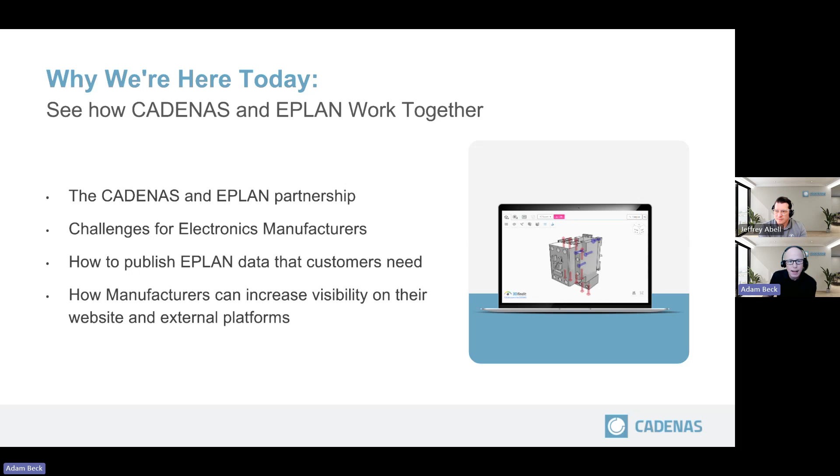I'm going to just hit the lobby button here because it's really blowing up about the Read AI meeting notes. Okay, check, sure, Read AI meeting notes. All right, back to it.

So just setting a baseline, what is eCATALOG 3D Find It by CADENAS? This is our online tool that helps component manufacturers deliver product data, configurators, 3D previews, and configured PDF data sheets on demand. Those are all qualified sales leads that happen right from your website. They help you build a great digital customer experience. It makes engineers want to come again and again, and it frees up your team from having to address those on-demand CAD requests. So it's really lead gen, customer success, and engineering support all in one.

And yes, read AI notes. I'll start letting people in, Adam, as they pop up, so you can keep rolling.

Thank you, the dinging. So really, what is the challenge today for electronics manufacturers? Many still rely on those PDF catalogs and data sheets, and few are offering those well-structured, up-to-date, dynamic EPLAN macros that engineers need. This reduces engineering efficiency, and it reduces the consistency for users, so they might have to do different things in different ways to get components into an overall design.

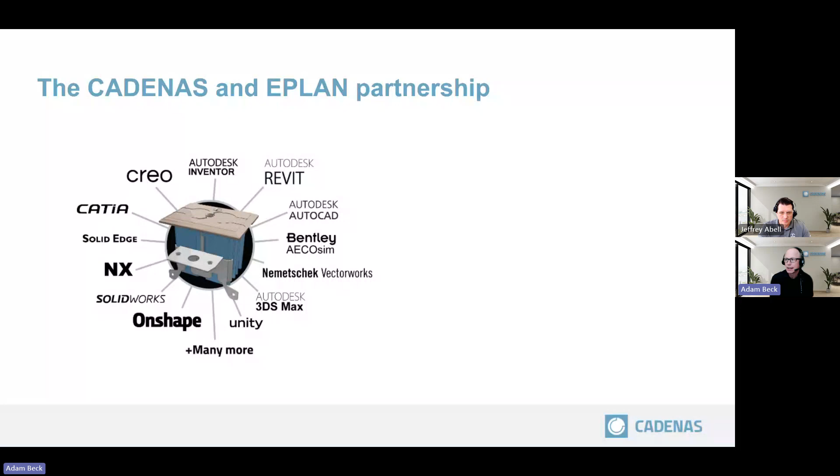So this new partnership with CADENAS and EPLAN is two companies working together to add complementary details, functions, and accessibility, and the goal is to deliver highly efficient, scalable, quality component data for EPLAN users. In short, it's what CADENAS has been doing for years and years for mechanical product manufacturers, providing all the formats that they know and love: Inventor, Solid Edge, SolidWorks, CATIA, Creo, NX, as well as many other BIM formats, but now the added layer of those EPLAN macros.

And Jeff, do you want to talk a little bit about what those EPLAN macros actually contain? Yeah, so there's, of course, quite a bit that goes into an EPLAN data set, right? And so what we're going to provide meets all those needs. The first part is this XML file, that's the structured product data, and that's going to include things like part numbers, descriptions, potentially ratings or certifications, all that kind of detail, the function templates, et cetera. So that's sort of the backbone that sets all the product data.

We also have the 2D data, of course, and that's going to be for anybody, if you're laying out your panel in 2D, you can certainly get the physical dimensions and everything from the parts that we provide, drag and drop those, move them around on your panel as you're laying everything out to check fit and so on. Same with the 3D, right? If you've moved on to the 3D design with some of the enhanced 3D features, you're going to be able to drop that model, that 3D model, directly onto your panel, make sure that it fits, line everything up, and get that 3D visual, kind of that virtual version or the digital twin version of your 3D model.

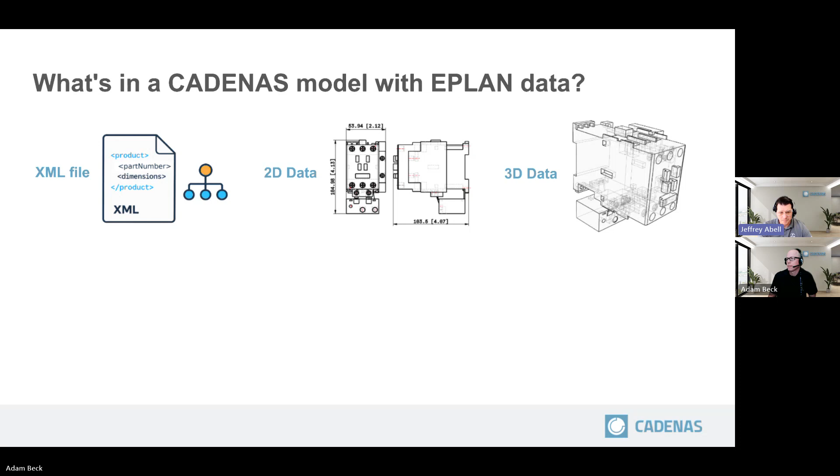We include the connection points, you see these red arrows that we've got on our models. Those will look probably very familiar to an EPLAN user, but that is the information about where the connections go physically, but also the attributes of those connections. What type of connection? Is it a screw connection? Is it a spring clamp? Things like that. How many connections you're allowed to have, what the minimum maximum sizes are, all that good stuff.

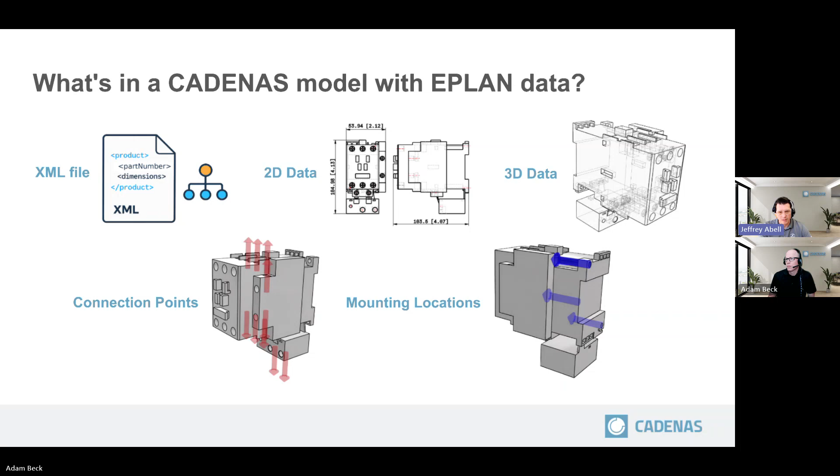And then last but not least is these mounting locations, and that's going to show exactly how that part mounts to either your mounting panel or whatever you're mounting it to, or if you're using a rail, it's going to snap onto that rail so that as you're positioning and laying out all your components, it's very intuitive to use that. And that information gets passed through. For example, like the mounting points, those can be passed through to an NC machine to automatically cut those things. So adding everything you would want in a complete EPLAN data set, we're delivering that with these kind of 5 key features that we've got.

And so what we've got today is structured and standardized electrical data for EPLAN users. What you can do on 3D Find It, we'll show you here in a minute, is you can go and find that component, review the documentation, visualize the product with the 3D viewer that we have, and download the EPLAN files. Comes with the EDZ package, right? Everything all in one.

Add that to your EPLAN database and then start dropping it into your designs. And it's all built specifically for the EPLAN audience, right? It is that EPLAN format ready to go directly into your EPLAN Pro Panel or P8, for your schematics, panel layout, all that good stuff.

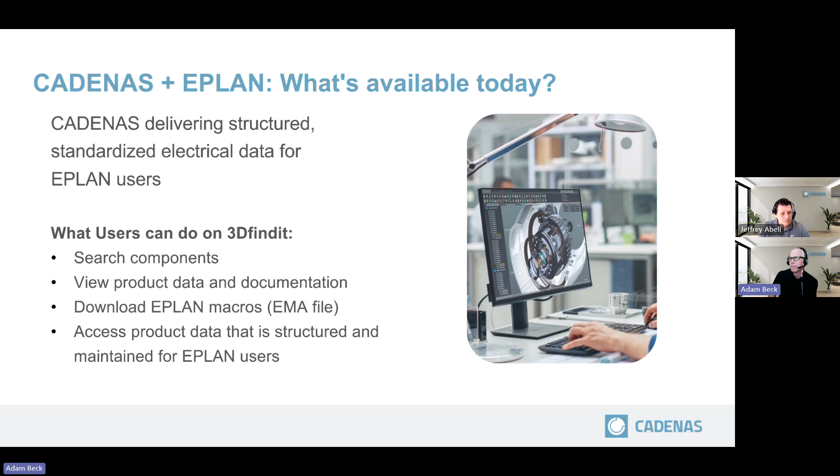Awesome. So I'm going to switch the screen over to you, and I'll let you show this in action a little bit. Sure thing. So hopefully everyone will see my 3D Find It.

So nope, you got to turn it on. Oh, I got to turn it on. Oh, sorry, there we go.

Got it, okay, cool. So this is our 3D Find It homepage that hopefully everyone's seen before. But from here, you can go and browse all of our catalogs, you can do searches, things like that.

Since we're working with electrical today, I'm going to jump right to Rockwell Automation, certainly a huge partner of ours. And from here, you've just got standard catalog navigation, where you can come in and basically choose whatever components you're looking for, navigate through. It's really straightforward, almost like a Windows Explorer type of path that you've got to navigate through.

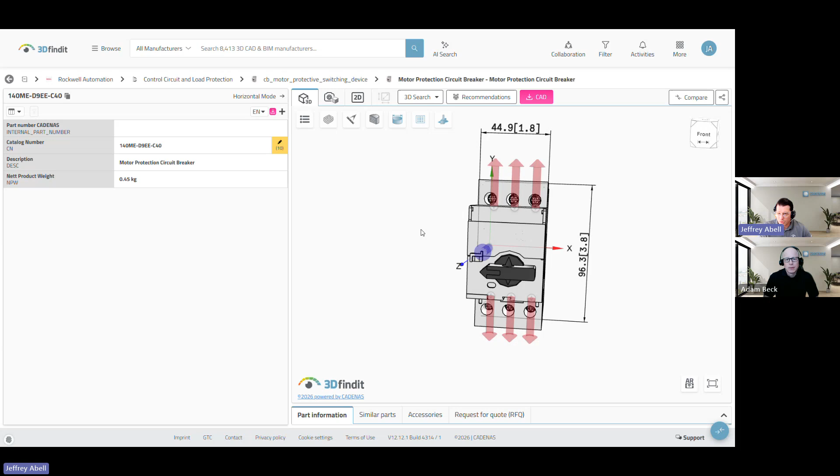So what's really cool about that is once you've gotten to a part, you can see here I've got my view in 3D. Not only do I have the 3D model, I've got these dimensions on it, so really nice to quickly and easily verify that.

But I've also got, in these red arrows, the connection point information. So this will give me details on that connection point, and I can actually go in and see this is connection 6. It's a screw connection with minimum and maximum cross-sectional areas or AWG values, what direction it's coming through, and all those things.

So what's really nice about that is all that information is going to flow out to the EPLAN content that we develop. And we have that for all of the electrical connections that you would have on this device.

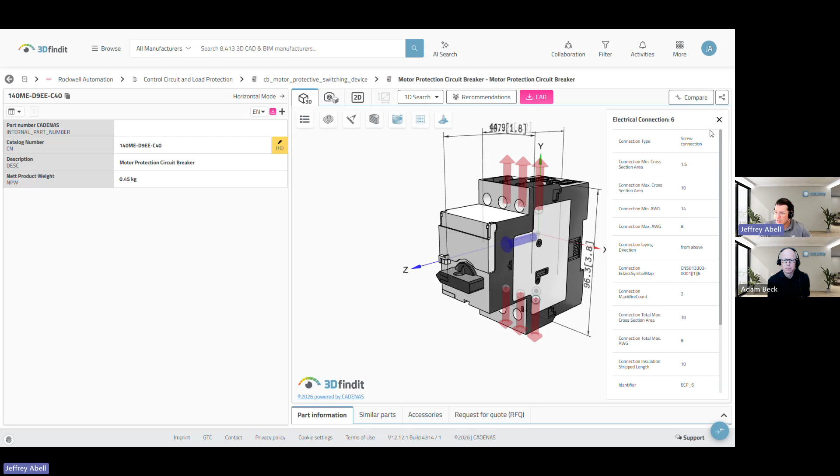Further, we have, in this case, just the single mounting point. As you can see, this is strictly a rail-mounted device, but we've added that mounting point there so that when you put that on your DIN rail, again, it's going to snap right to it, and you can slide it along your DIN rail in EPLAN to properly align it.

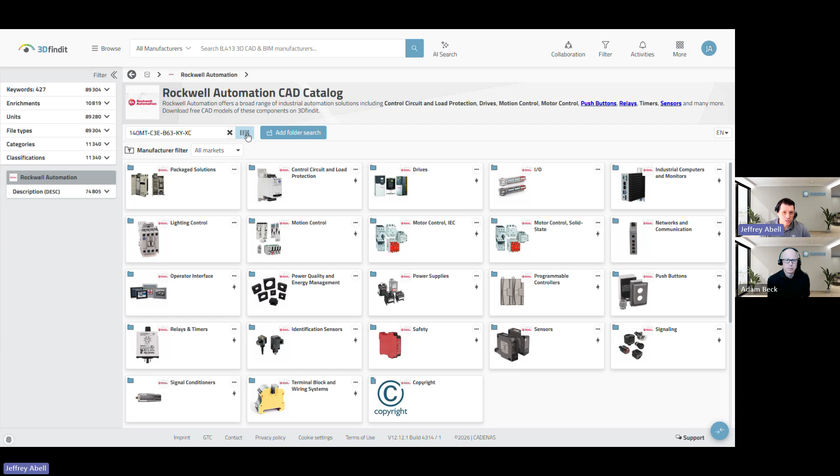And so we've got a lot of this content available. What's also cool is if you have a specific part, I'm going to search for 140 MT here. You can actually do a search for exactly that part, and you can see it's going to take me directly to this model. I've got my description, my part number, and from here, I'm ready to download my files.

We got the huge file list, right, that we're kind of world famous for here at CADENAS with all the various formats that we've got. But we've also included these EPLAN formats for download too, whether you want IEC or NFPA. Both are available. Of course, it'll adapt to the symbol library that you're using, as well as the layout scheme, vertical versus horizontal, kind of the spacing, right, what size grid you're on, et cetera.

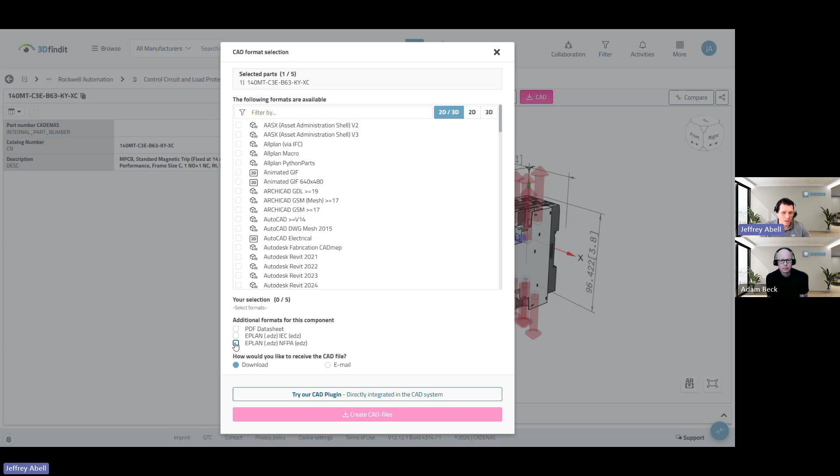So we'll choose our EPLAN file, and it's going to go and generate that for me. And actually, once I download that, I'll be able to show it's going to be an EDZ file that we've created, right? And you would integrate that directly into your EPLAN exactly as you have other product data you've downloaded.

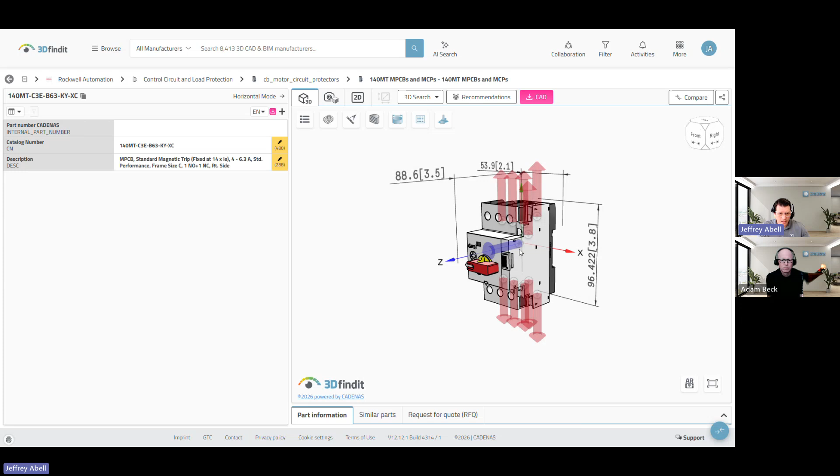So I'm going to pause just for a minute here, just again show you kind of the 3DfindIt here, and then switch over into EPLAN, and so save some time.

We've already integrated that product into our EPLAN database here. So as you see, it's got all the product data that's going along. That includes descriptions, reference to the connection point pattern, any attributes that have been built into that.

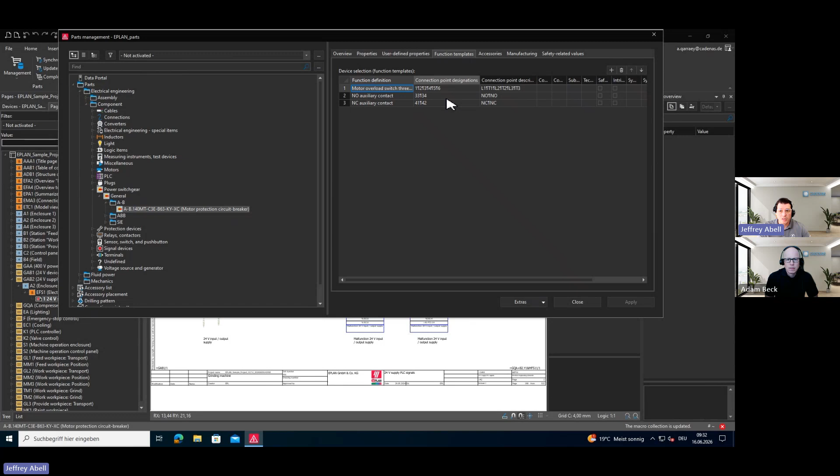You can see the 3D view even is included. All the macros are built and included. That's for the 2D and the 3D as well. The function template, you can see that will include all the functions that we need.

So all that data is available, ready to drop into our design. We're going to come in here and take this unit and replace it with the one we just downloaded. Pull that up, go assign the part to it. You'll see that Rockwell part is automatically in our database. We can find it there and drop it in, overwriting our existing one, making sure we've got all our manufacturer data and everything straight.

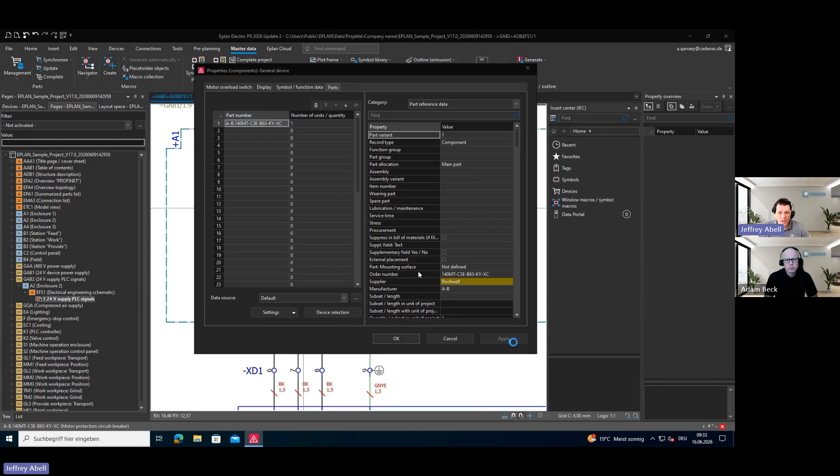Once we get that plugged in, we'll assign that part, apply, and that's what goes to our device list, what goes over for our bill of materials, everything. So now in this schematic, that's declared as that Rockwell 140 product, making sure that's what we have when we go to the purchasing department.

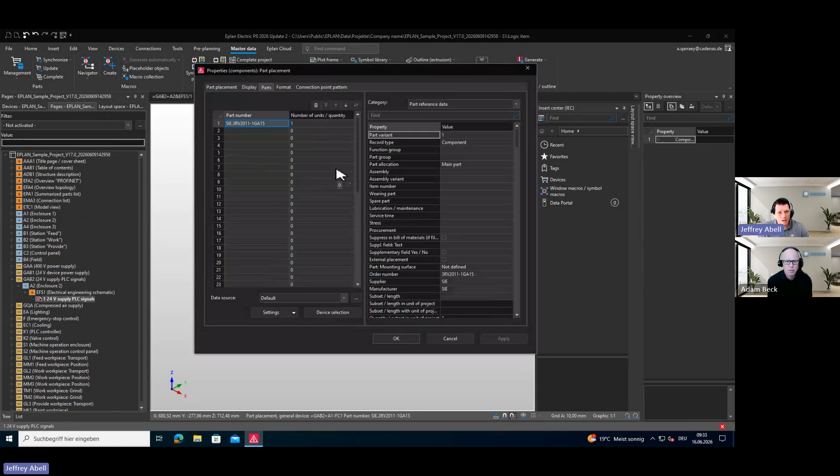Likewise, over here on the 3D, I'm going to pull this up and replace it with the Rockwell part we just downloaded, and show you how you can integrate that quickly and easily. Grab that part, overwrite the existing one we've got there, and place it on the 3D. Make sure all our supplier information and everything is correct.

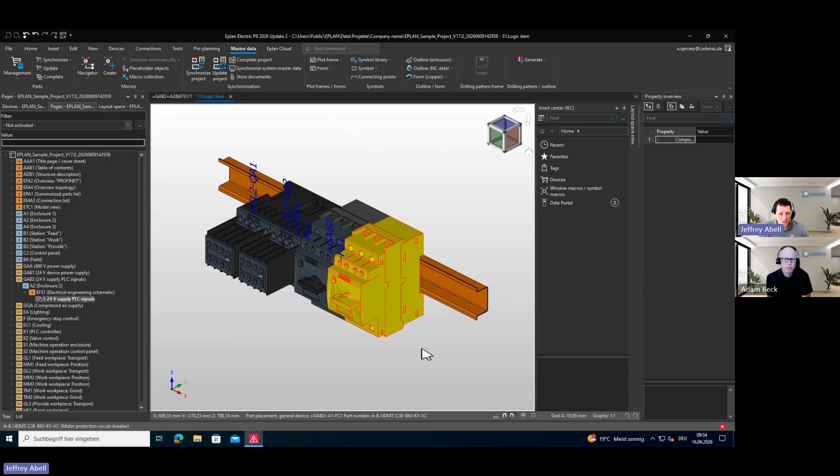Once this catches up, we'll see it replace the 3D model that's standing in there with the new one we just downloaded. So you can see, there's that new 140 that we've got in there. As you go, you can click and slide that along, and you'll see it snap to the midline of that DIN rail based on the connection point we built into it. So it functions exactly like you'd expect, easily snapping onto those rails for layouts.

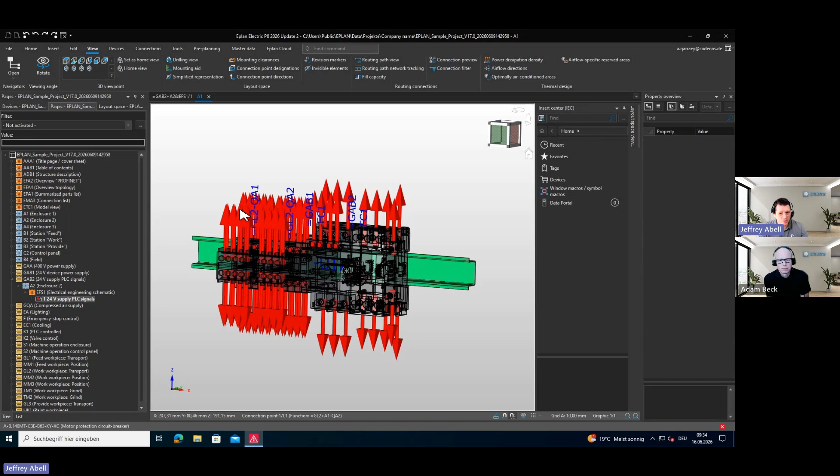Looking at the connection points, you can see we've got all of the red connection points, just like we saw on the 3D Find It site. That has all that information available there that all passed through. And now in routing these, it's going to take all those connections and route them to the other devices that we've got.

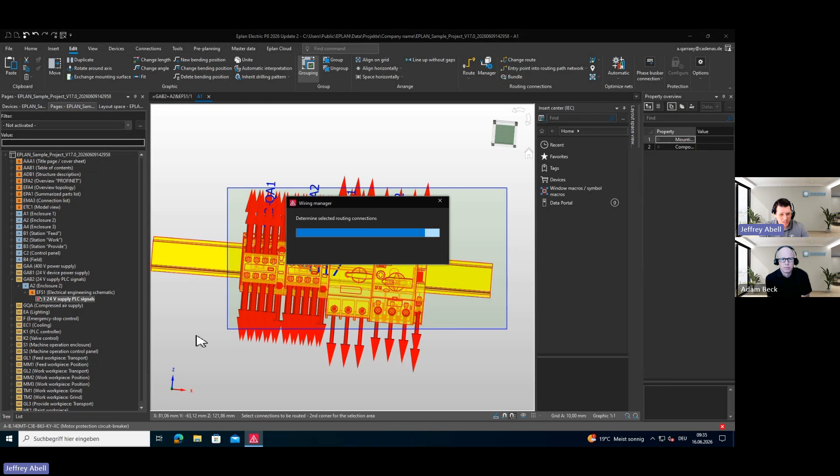So it supports all of those automated tools that EPLAN has, right? That automatic wire routing that saves a lot of time and finds ideal pathways. Compared to having built this myself or downloaded a 3D model, added it in, clicked to make all those connection points manually, you have this all-in-one data set directly from 3D Find It.

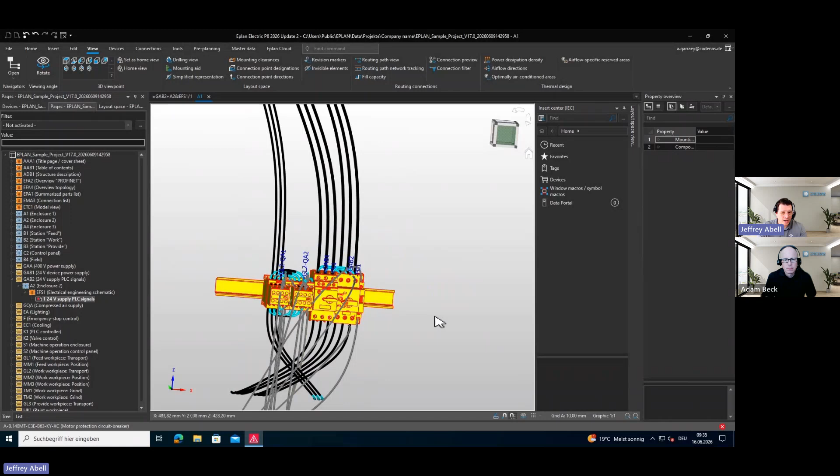Supports all of the EPLAN functionality you'd look for. We didn't show the 2D layout, but that can be included as well with the 2D macros we've got. Just a real quick and easy way for users to get the data they want into their EPLAN database and into their projects.

Of course, that's great for manufacturers, helping you get your parts selected by the people doing these panel layouts, these panel designs, and really streamlining that process for everyone.

But these components would be inside of an enclosure that could have dozens of other components. If you're thinking about it, I mean, I'm just seeing the time savings here. If you have every one of those that you have to figure out every wiring connection and every mounting point manually, that could be hours and hours of extra time spent versus these snapping into place and wiring right up.

Yeah, it is really amazing how much time and frankly money is saved with some of these automated wire routing things, not just in terms of the time to lay them out, but even reducing scrap wire and finding the ideal length. So having these next level features for the electrical engineers is absolutely critical.

Yeah, even accuracy. I think there's a whole level of accuracy here to making sure all those wiring connections are going to the right place, that it sure makes it easier.

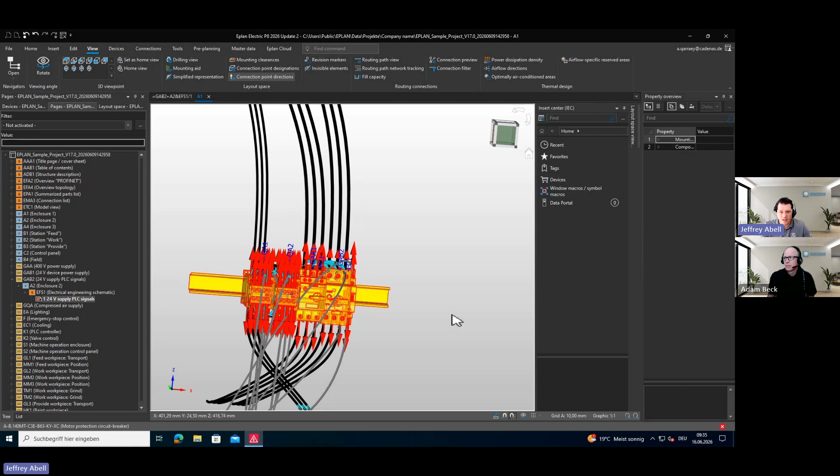Yeah, and it'll check too if you've tried to connect a giant wire to a device that can't handle that amperage or voltage, or even physically isn't big enough to take that connection, it'll flag that. So it's not just, hey, this is where the wires connect, but having the details of how they connect can impact strip lengths, and it really starts to cascade into great levels of detail that the EPLAN platform and this enriched data helps you avoid mistakes or wasted time.

Yeah, that's awesome. Thanks. So summarizing the whole thing here, the idea is to enable electronics manufacturers to stand out from the crowd. By delivering high quality EPLAN macros on demand, they're reducing electrical design time for users and differentiating themselves from other manufacturers who may only have a static PDF or static files.

Ideally, this is going to increase usage and trust by users, keeping them coming back again and again. So with that, let's jump to the Q&A.

Is it possible, if I have an existing eCatalog, to add these functions to my existing content? Yeah, absolutely. If you've already got a catalog with CADENAS, we can go in and do what we call enriching. We can add that EPLAN and ECAD information onto your existing catalog, so it's definitely not starting from scratch, it's just adding on and doing that enrichment. What's great is we've already got the mechanical side built, we've already got the geometry there, and it's already been approved through our QA checks. So you've really got a head start if you've got a CADENAS catalog already.